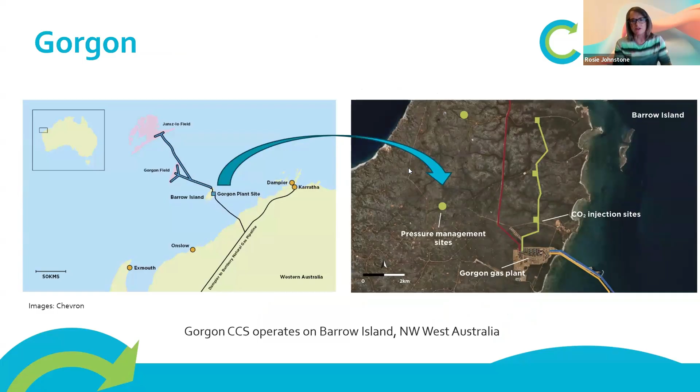So we're going to start close to home. I'm speaking to you from Perth, and off the west coast of Australia is the Gorgon project, which operates onshore but on an island, so it sits in state territory. And there is the Gorgon processing facility there for LNG, and associated with that is the largest operational CCS project in the world at the moment, which is the Gorgon CCS project. Next slide, please.

So this is a project that's been very long in the making. Discussions around the Gorgon LNG plant started way back in the early 2000s, and under successive governments, state and federal, both Labor and Liberal National, this has been a long supported project. But the reason that it exists at all as a CCS project was because it was a requirement. For the joint venture for Gorgon to go ahead and put the LNG plant on Barrow Island, there was a requirement that they would have to set up a CCS project, which is targeting around about 80% of the reservoir CO2 from those associated fields that feed back into the facility.

And since the 2023 safeguard mechanism reforms, that is now a safeguard mechanism facility, and it has to now start reducing its emissions year on year. But of course, this had a very early start, and so is in a place now to be up and running, albeit with some operational issues, but still, broadly speaking, successfully sequestering CO2.

So the way that the government's been involved in this one is basically by actually making the project go ahead. There was a little bit of seed funding early in the day, $60 million, albeit out of a much larger budget, and it's now a designated safeguard facility. So if we encapsulate why Gorgon as a CCS project exists, it's because it was the price of doing business. Next slide, please.

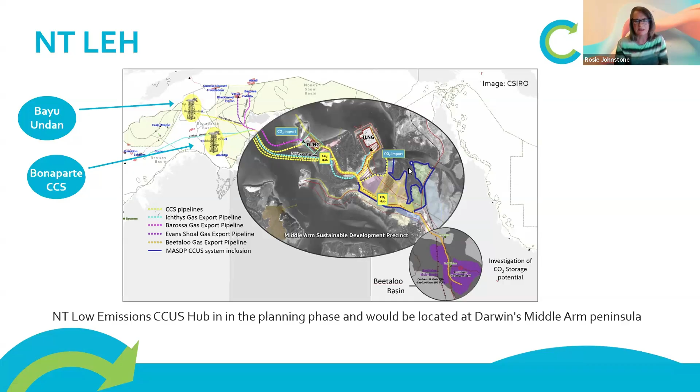So what's the role of the government in this one? So this is slightly different. Bayu-Undan is outside of jurisdiction of Australia. It is in the waters of Timor-Leste. And so we're going to need that transboundary bilateral agreements and considerations around the London Protocol.

The Bonaparte CCS project, being more of a sort of a greenfield CCS project, has needed a lot more upfront data gathering, and that's come in the form of quite a few pre-competitive studies and a dedicated 2D seismic survey, all under sort of variations of the flagships funding and CCS R&D programs. In fact, that was my very first project that I worked on was in this area.

We could argue that the government is involved in helping with the planning phases of the low emissions hub, which is CSIRO's involvement. And then there's another couple of ways that this project's a little bit different. So the operator of the Bonaparte CCS project is INPEX, which is partially a nationally operated oil company, as in 23% is owned by the Japanese government.

And then similarly, this is the first CCS project in Australia that's been granted major project status. And along with that comes some sense of streamlined regulatory approvals and a bit of government facilitation there. So the emerging theme here is that all of these projects, to a greater or a lesser extent, have compliance issues, but also some help from government as well.

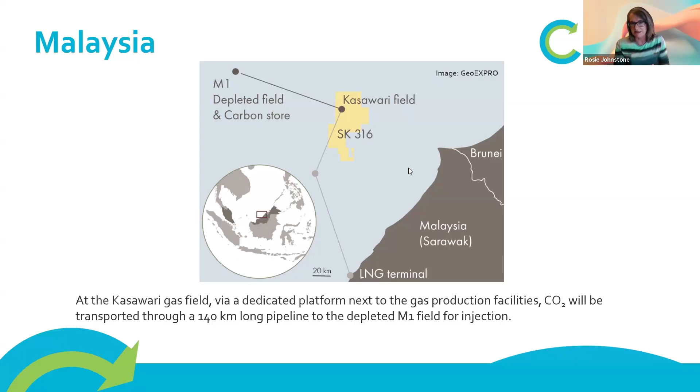Next slide. We're now going to leave Australia and we're going to start to circle out into the Asia-Pac region. And we'll first look at Malaysia. So here is probably the most known Malaysian CCS project, which is the Kasawari field, taking CO2 with a dedicated facility and a pipeline going out to the depleted field at M1.

Next slide. So this is one of 5 to 7 CCS projects in Malaysia, and to a greater or lesser extent, they pretty much all involve Petronas, which is the national oil company or the nationally owned oil company, which has also been tasked with the development of CCS. And indeed, that CCS bill that came in just this year in 2025 has been written very much with Petronas in mind as well. So we can see here that if you have an NOC, you can quite quickly write the regulations, and then those two things can really accelerate the setup of CCS projects.

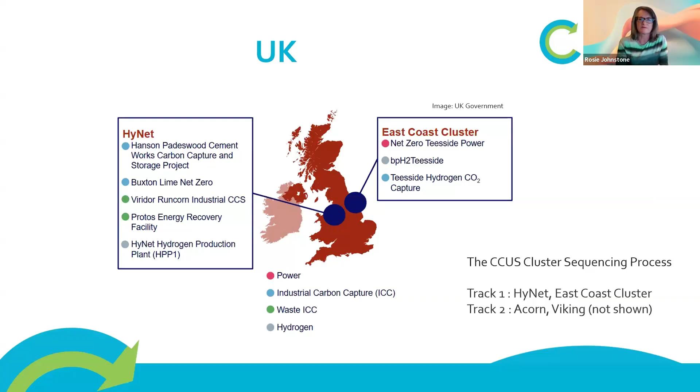Yeah, so it's quite a hefty amount of public funding here, £21 billion over 25 years. But the idea here is that it's not just direct grants, but also using contracts for difference. And I guess we see that now. It's a role that the Norwegian government played in the Northern Lights project, which is a way to de-risk the projects by guaranteeing long-term revenue.

So it's taking away some of that risk associated with purely commercial CCS projects, of which there really are very few in the world. There has to be government involvement in some way or another as some sort of incentive or compliance measure. Next slide.

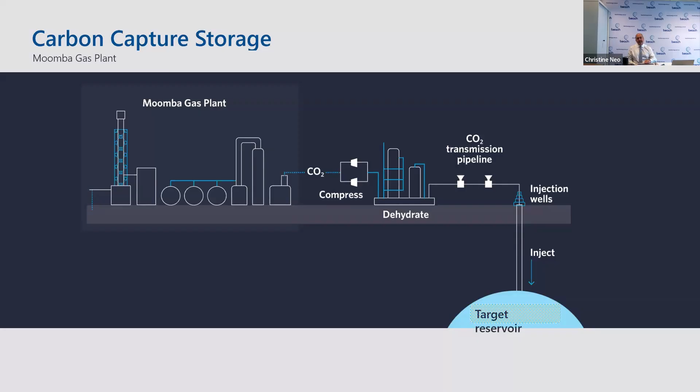And then, of course, that depleted hydrocarbon reservoir that becomes our source of where we're going to put the CO2, it stored gas for millions of years, and it definitely is set up to handle the carbon dioxide. If we go to the next slide.

as we can. Each one of these projects takes years in terms of working through the approvals and the actual execution pathway, as well as navigating the engagement with different levels of government. And so, of course, here in Australia, working with the state governments as well as the federal governments on what that CCS framework looks like.

I think ultimately it is very clear that CCS is part of the solution, and it's an important part when you say, how do you manage aging infrastructure, different types of combustion engines that are used around the world, as well as different sources of CO2 that are either from oil and gas production or through manufacturing. There's going to be an ongoing need for safe, affordable, and reliable energy.

And I think ultimately CCS, in conjunction with electrification and looking at using natural gas for manufacturing and peaking for electricity, it forms a very, very important relationship. If we go to the next slide, please.

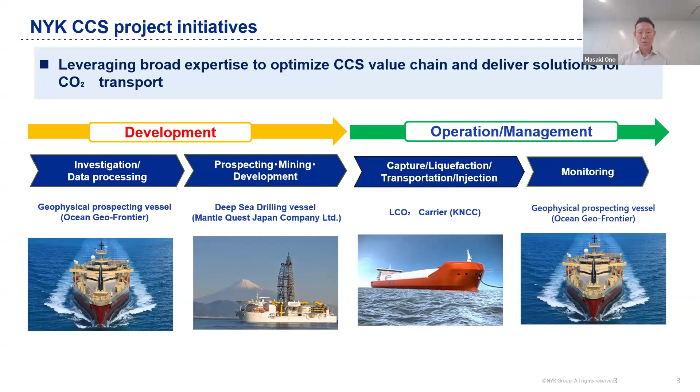And you may know more about LP and MP. EP is the technology of KNCC. So I would like to explain about EP CO2 shipping in detail today. So next slide, please.

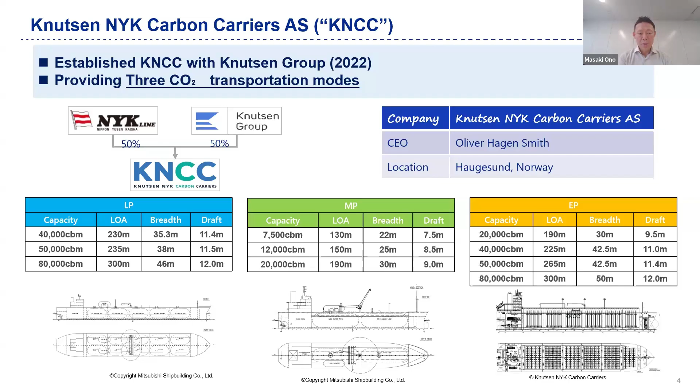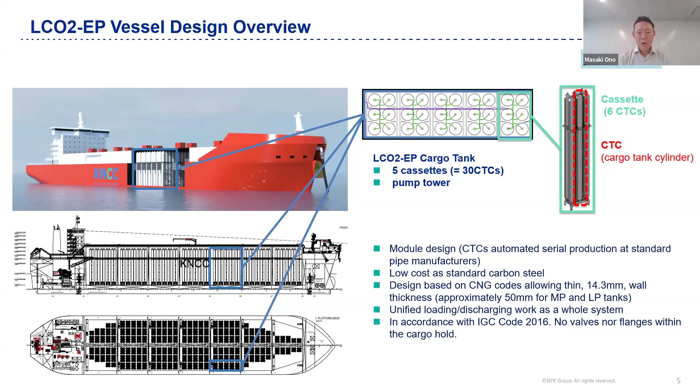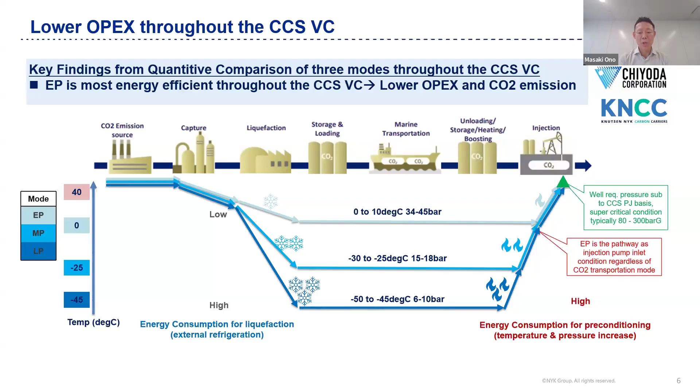And also consumption of electricity is less, and energy is also less. Which means that EP mode could reduce the OPEX for the total value chain. Next slide, please.

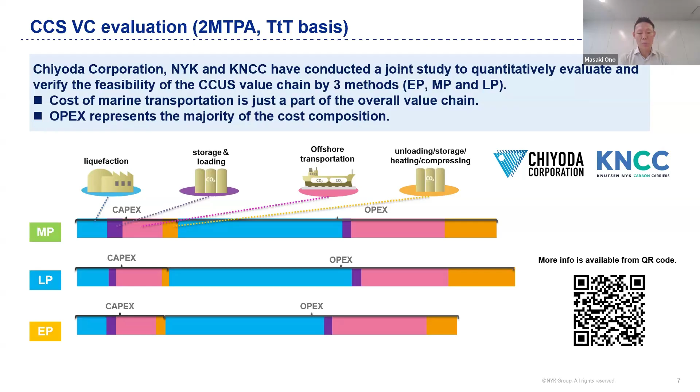This slide shows that together with Chiyoda Corporation, NYK and KNCC had a joint study to evaluate the 3 modes last year. So you can see that transportation, the pink color, itself is not so different between MP, LP and EP. But in total, considering the value chain, liquefaction, storage, loading, and unloading side, the total cost can be reduced by EP mode rather than MP or LP. And next slide, please.

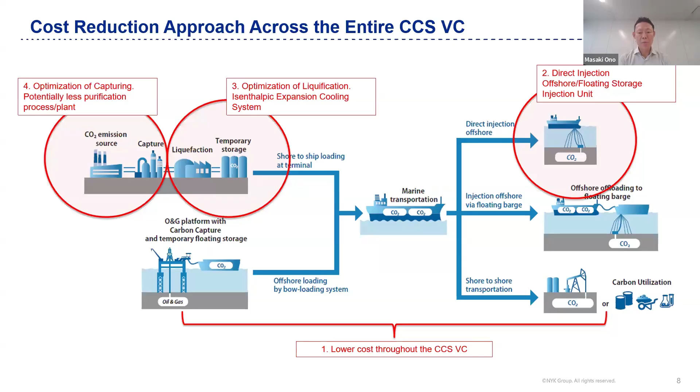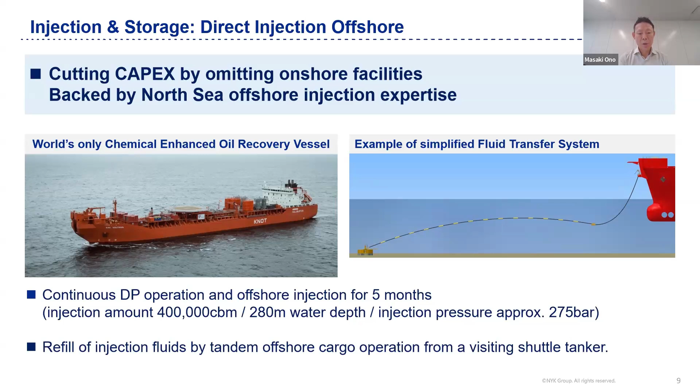A DIO vessel for CCS has not been developed yet, but together with Knutsen, we have another joint venture company operating crude oil shuttle tankers, named KNOT. Some of these shuttle tankers have chemical injection experience for EOR. Those shuttle tankers have dynamic positioning, DP. So using KNOT's experience in direct injection, KNCC will develop such a DIO for CO2. Next slide, please.

But with the offshore solution, they don't need a liquefaction plant onshore. Using the pipeline, the gas is transferred to this FLSU, and then liquefied CO2 is offloaded into a CO2 vessel in order to transport it to other countries. Next slide, please.

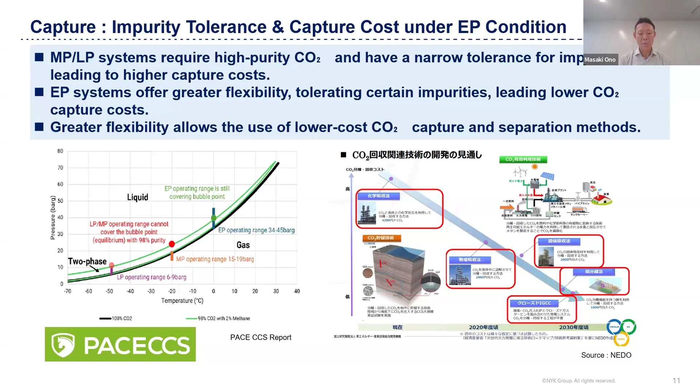On the right-hand side, sorry it's in Japanese, but if EP mode can accept more impurity than current amine operation, we can consider other more economical types of absorption, like a membrane or other chemicals. So I think EP can reduce costs on the capturing side as well. Next slide. This is the final one.

Yes. This is my presentation about NYK's CCS strategy. So happy to take questions.

Thank you for sharing NYK Line's incredible efforts in building a carbon neutral maritime future. It's really inspiring to see how Japan is spearheading such a crucial part of the CCS ecosystem. And now let's move to our Q&A segment.

So first of all, what regulatory or legal challenges currently hinder the cross-border transport or storage of captured CO2 in the APAC region? Especially in the APAC region in Asia, the first regulatory hurdle is the G2G discussion to establish bilateral agreements to transport CO2 from, for example, Japan to Australia, Indonesia, Malaysia, something like that.

So once this regulation is materialized, we can discuss with government or other private companies to develop such a CO2 project. So I hope that such a G2G discussion will be completed soon.

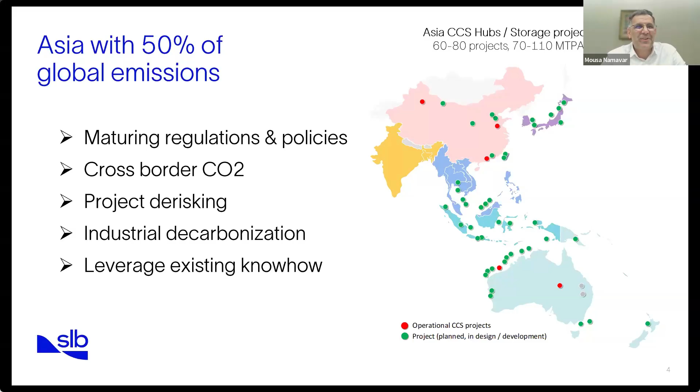And last point, but I think very important, is we need to share the lessons learned from the rest of the regions, bring it to Asia, and within our region also share know-how and best practices. So these are the few angles that I think are critical for Asia to consider when we are scaling it up. Now, next slide, I've talked enough about the general context. Let me talk a little bit about technologies, right?

So when we develop storage sites, there are three key performance factors that we need to address. These are about how much CO2 we can store, what injectivity rates we need, and that there will not be any leakage, so we have assurance about containment of CO2. So the role of us as a technology company is to identify, measure, and characterize the reservoir storage capacities very well upfront. That is a lot of de-risking that happens early on.

We need to optimize injection performance and long-term well integrity. Again, as technology providers, we have a lot of means to do that. And then we have technologies and techniques to monitor the storage site containment, what is very well known as MMV. Those are the areas and role of technology providers like us to ensure the storage sites are de-risked and are successful when it comes to their injectivity and containment.

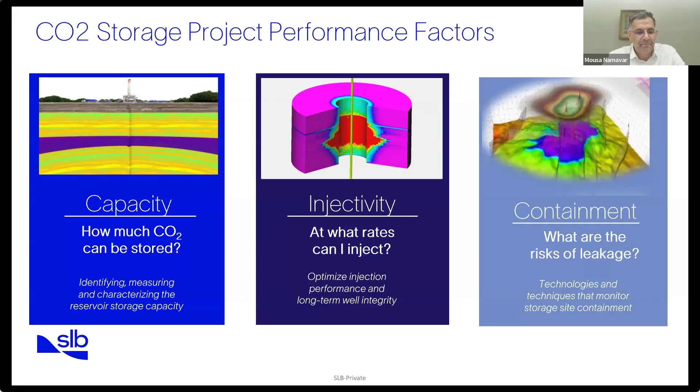Moreover, next slide, when we talk about areas where SLB is specifically bringing a lot of ideas to the table, it is standardization. We need to standardize workflows and methodologies in CCS in order to impact at scale. Front-loading risk assessments, we said, is very critical. Having optimum design using modeling and simulations and risk assessment is critical, and those are the first two solutions on the left that you see there: site screening, ranking, site evaluation.

These solutions are able to bring the risk of the projects down upfront, very methodically and in a systematic approach. We've been investing in technologies to enable this standardization and these workflows. And that is a critical role, an example of areas that I want to bring up of what we are doing. Specifically, talking about Asia, we've got a lot of depleted oil and gas fields.

That is actually good news, because it means that we have a lot of storage sites, but it comes with the inherited risk of wells that need to be assessed for their integrity and then remedied if required. We announced earlier this year a solution called well integrity assessment. Again, a standardized and systematic approach to address well integrity challenges or assessments within a field in the context of CCS. So these are some examples that I wanted to share with you in the short time when it comes to the storage side. Moving on to the next slide.

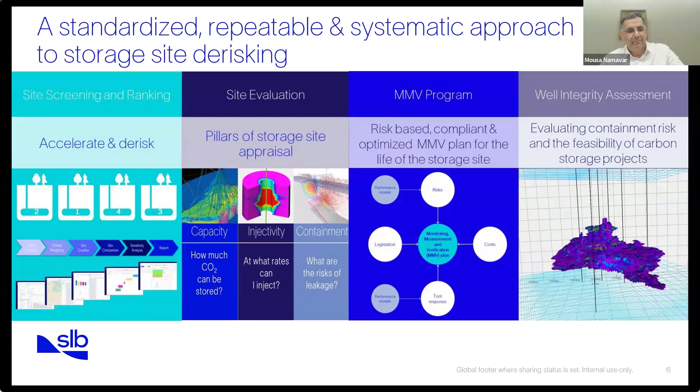A bit about carbon capture as well, and I think this is a very hot topic, and I'm very excited to talk a little bit about it in our context of Asia, what we are doing. So first of all, this slide shows the portfolio of solutions that SLB Capturi, our post-combustion carbon capture company, has commercially in the market. What you see here, there are two flagship products, Just Catch and Big Catch.

Just Catch is the second one that you see in the list. This is a modular technology; through the modularization, we've optimized the process. We brought a lot of cost efficiency to the table. The system that you see here has a capacity of either 100,000 tons or 400,000 tons, and you're able to stack them next to each other and increase the capacity. So through this modularization, we are able to get a lot of advantages that I'll show you on the next slide. On the other hand, I want you to look at the far right, Big Catch.

Big Catch system on the previous slide. Sorry, hold on, I confused you. The Big Catch system is a custom design solution. With this custom design solution we are able to address megaton carbon capture designs. When we need advanced heat integration or advanced installation, or maybe the surface area is very specific, that is where we go with custom design solutions around the plants.

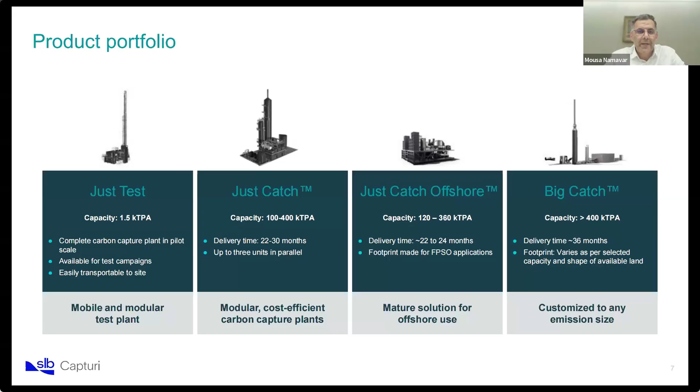With this modular technology, I mentioned that through modularity we've achieved a lot of efficiencies and advantages. One of the key ones is actually the footprint. We were able to reduce the footprint significantly, and at the same time, you are able to transport these units more easily. They're prefabricated. You move them to the location. You install them,

assemble them, and you're able to address a lot of challenges in Asia, for example, in Northeast Asia, in Japan, Korea, Taiwan, and a lot of other regions where we have space scarcity. Footprint becomes very critical, and this is how we are able to address it through this modular system, besides a lot of other advantages that, in the short time, I'll not touch on. I'll show you two pictures, then I'll end my presentation.

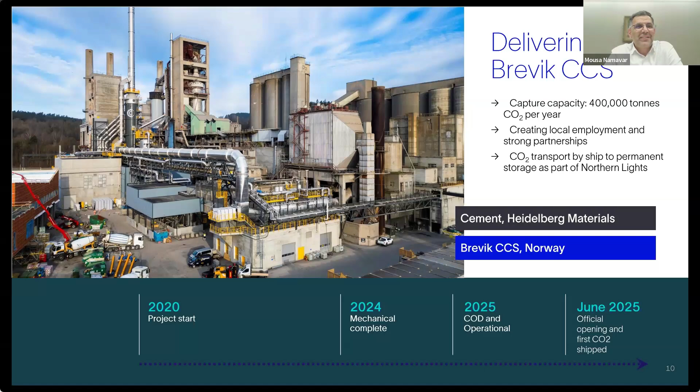Thank you for your insightful presentation. Your perspective on scaling CCUS with data-driven innovation is a great reminder that the technology to decarbonize heavy industry is already within reach. We'll now move into our Q&A portion. So first of all, what are the viable carbon solutions offered for the petrochemical sector in your mind?

It's a good question. I think it's a wide question. The way I would answer is that decarbonizing petrochemicals, first of all, is tough because you've got many types of emissions. You've got emissions from the process chemistry, and you've also got some emissions from burning fuel. So there's not one single silver bullet, I would say. What we need to have is a portfolio approach. First, of course, like any other industry, everybody goes towards squeezing out energy efficiency, heat recovery, better insulation, and those types of solutions first.

But CCS can play a key role here, in addressing emissions, mostly from the thermal units first, where significant combustion happens in crackers, for example, in furnace burners, in steam generation processes. For these, we are able to apply the existing carbon capture technologies. The SLB Capturi technology, for example, applies very well to this environment.

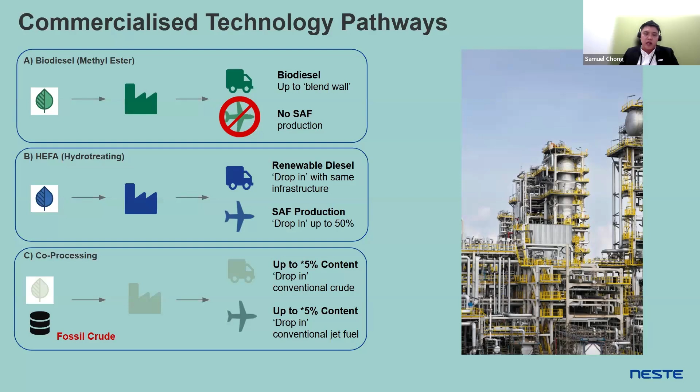Last but not least, for major refiners, oil producers per se, they have been embarking on the co-processing front in terms of producing SAF as well by retrofitting the current fossil oil refinery, and that can be available as well, but it is capped at about 5% of the content that can be dropped in or blended with conventional Jet A1.

So a bit on Neste of the process that we use. This is a highly simplified page that we put together. For Neste, we source for raw materials globally. Some of the classic examples, which we probably will hear from the industry, include used cooking oil, animal waste fats, and we process the waste through various steps.

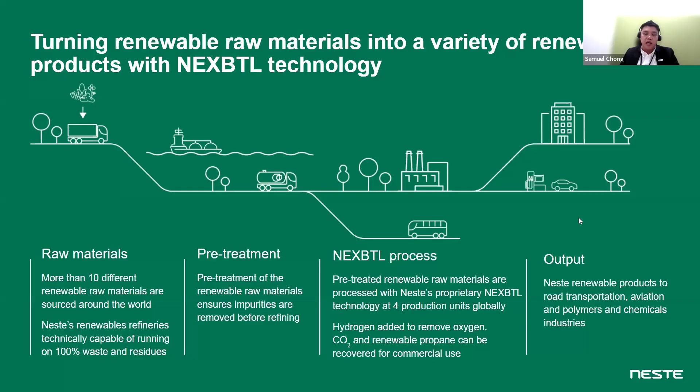The second is a pre-treatment step to get rid of most of the impurities, and then it goes through a patented technology known as NEXBTL, which is really hydrotreating, that allows us to remove most of the oxygen molecules and form a straight chain paraffinic molecule itself. And that stream is further fractionated to produce renewable fuels, chiefly renewable diesel and SAF. And once the tanks are batched, that's when we are ready to supply the fuel to various locations.

So for Neste, at this point of time, we are heavily invested in the HEFA technology, which is hydroprocessed esters and fatty acids, to produce a renewable fuel. And on the innovation front, we are also invested in further developing different feedstocks that could be used to produce renewable fuels. And they include novel vegetable oils, which are really feedstocks grown on degraded land, land that is no longer viable for food crops, and of course lignocellulosic, which is really biomass that we are looking to process and turn into renewable fuel.

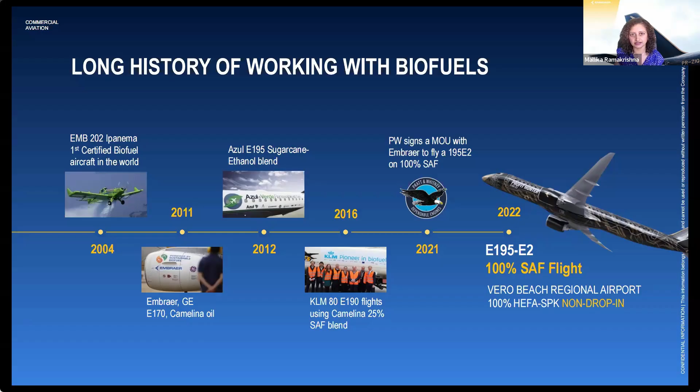And from 2011 to 2016, we have been testing various SAF blends, and we've also partnered with Azul, GE, and KLM in pioneering flights using SAF blends. In 2022, we had a very special milestone where we successfully completed flight tests on the E195-E2 with 100% SAF. Next slide, please.

One more slide. And coming back to our product, it's important to emphasize that although we are exploring alternate propulsion technologies, the role that currently available products play in reducing emissions cannot be emphasized enough. If you can move to the next slide, please.

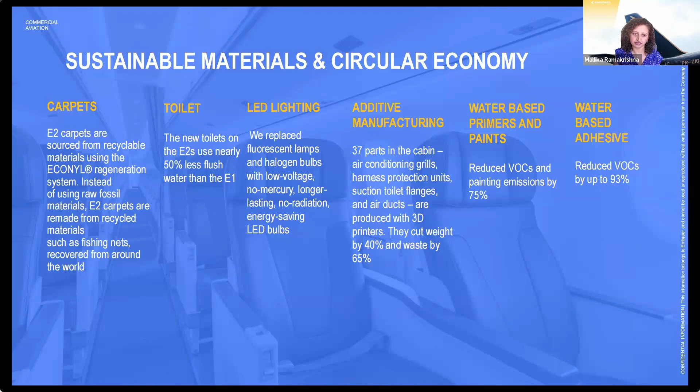We've also expanded the 3D printing process to more parts in the cabin. 3D printing not only helps reduce aircraft weight, but it also lessens the material waste that is produced. So we are working very hard on making sure that the cabin is as sustainable as it could be, not just from a current point of view, but also in terms of easier disassembly and recyclable parts once it reaches end of life. Next slide, please.

This is a quick look at the Energia family. These concepts were launched in 2021, and the objective was to offer a range of platforms for different suppliers to integrate their technologies onto. Since 2021, it has evolved quite a lot based on inputs from our Energia advisory group, which consists of major stakeholders from the industry. So today we have 3 concepts that we are working on with different suppliers.

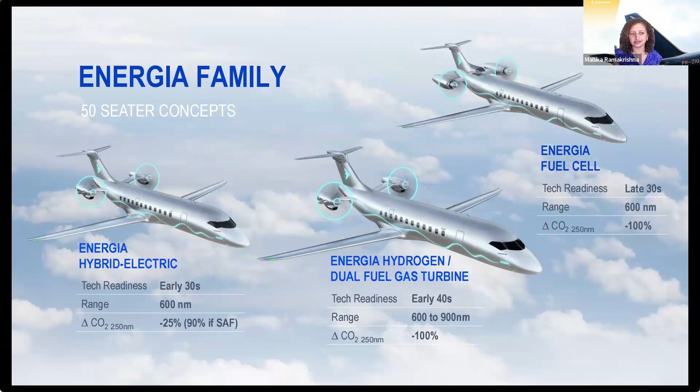One is the hybrid electric version, which can use either Jet A or SAF, where we are looking at technology readiness by the early 2030s. We also have the Energia fuel cell, which has the potential to be the first clean hydrogen aircraft, and technology readiness could be somewhere in the late 2030s, depending on how mature the infrastructure and the ecosystem will be. And the third is the dual fuel concept, wherein you could power the gas turbine using either SAF or hydrogen. Next slide, please.

Thank you, Malika, for your forward-thinking presentation and for sharing how Embraer is reimagining the skies of tomorrow. We will now take a question to wrap up this fascinating session. How can OEMs make significant differences, when most of their emissions are within scope 3? Yeah, that's a great question. It is true that most of our emissions come under scope 3 because it depends on the operators of our aircraft, who are mostly airlines.

But I do believe OEMs have a very big role to play and can make a big impact. One, by designing the most efficient aircraft so that airlines can use the aircraft and reduce their emissions. This is critical because airlines are working very hard to meet their decarbonization targets, and we have very stringent regulations today, and also mandatory CORSIA obligations which will kick in very soon. So having the most efficient aircraft available is one of the primary responsibilities of an OEM, and we can make a big impact there.